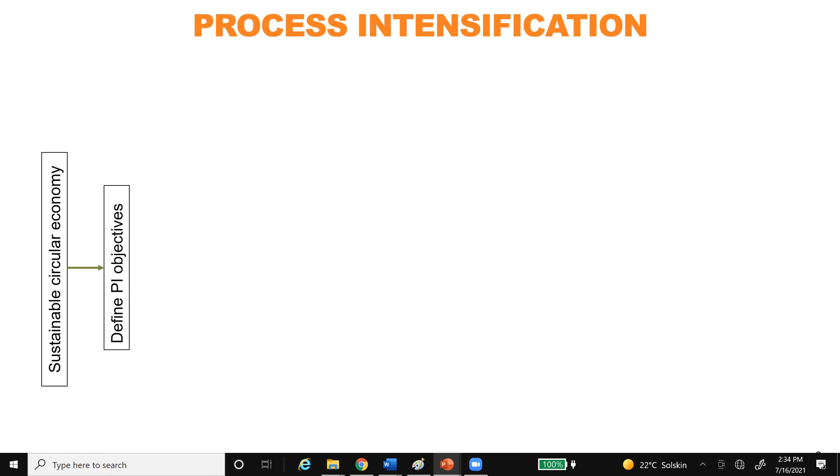Based on this, we define the process intensification objectives. There are many ways to achieve process intensification. Almost everybody can claim that they are doing intensification, so there are many ways to do it, and we have to be clear what those ways are. What I've listed in the third column are some of the ways to achieve process intensification. It is by no means a complete list. We can achieve intensification through higher productivity, better species utilization, supply chain, multitasking, equipment operation, increased efficiency, safe and reliable operation, economic improvement. These are some of the means to achieve the objectives.

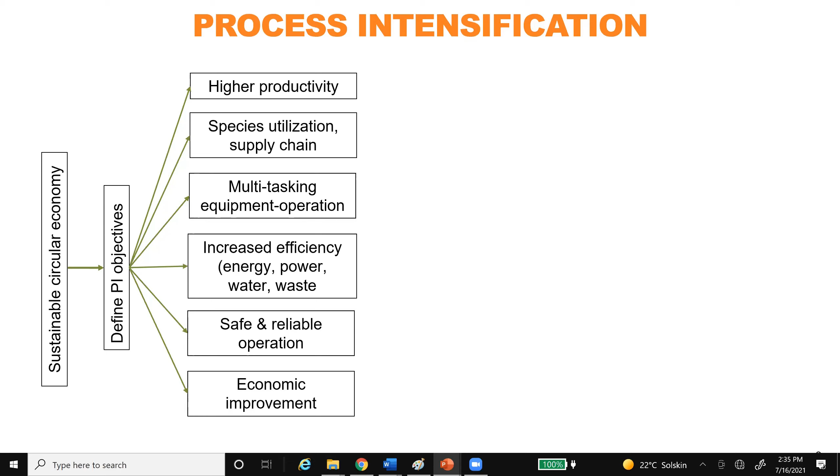How do we achieve these objectives? These are the sub-objectives of process intensification - if we want to achieve sustainable circular economy, we can achieve PI objectives of higher productivity or multitasking and so on. But to achieve these, there are different means. We can look at a better reaction path, better species allocation, heat and power management, rate size mechanisms - that means the transfer rate is connected to the size of the mechanism - tasks and equipment, scale up, scale down, controllability, operability, and many more. All of those things can help us achieve some of the objectives that I've listed.

The means to achieve these objectives I've given - what is the result of that? By one or more of those means, if we achieve the objectives, we will see that we have defined a novel network of processes that can be called a module, a flow sheet, or an enterprise at a larger scale. We can have novel integration schemes. We will see that we can generate new intensified equipment. We can have new processing routes because of reaction, species separation, and so on. All of these results can be achieved through the means to achieve PI, and the means to achieve PI will give us the objectives criteria that we would satisfy, which would then lead to sustainable circular economy.

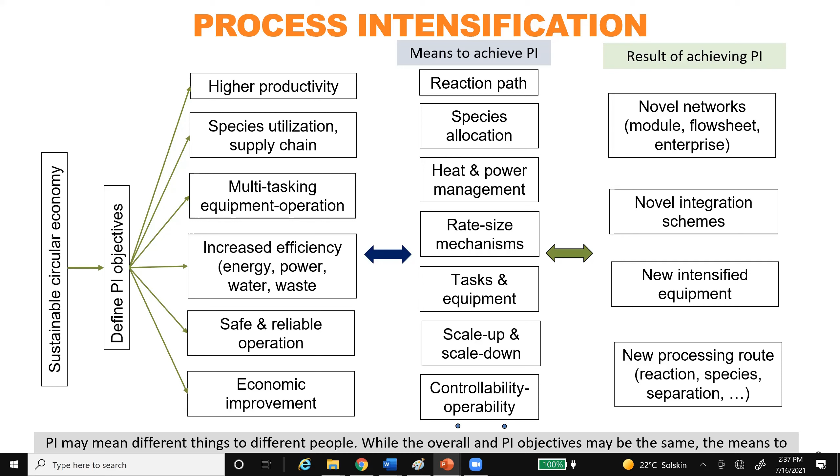Let us see some examples of intensification. On the left, you see the actual process that we have also used during the first and second webinars, for production of methyl acetate from reaction of methanol and acetic acid. The entire process can now be represented by reactive distillation, which will give exactly the same product.

That's process intensification. In a similar way, this is also a process that has actually been designed and converted, in the case of edible oil. The final step of edible oil processing is to remove some chemicals that have a bad smell, so you don't get bad smell in your food product when you cook. But these chemicals that have to be removed are actually quite expensive products that are needed by the pharmaceutical industry and the food and other industries. So it is valuable to separate them and use them in other industries.

The process you see on the left can be converted into one equipment where there are multiple subsections doing all the operations that you see on the left. So the question then is, can we have a computer-aided system that can take this process on the left and give us the result on the right? We will see how to get that.

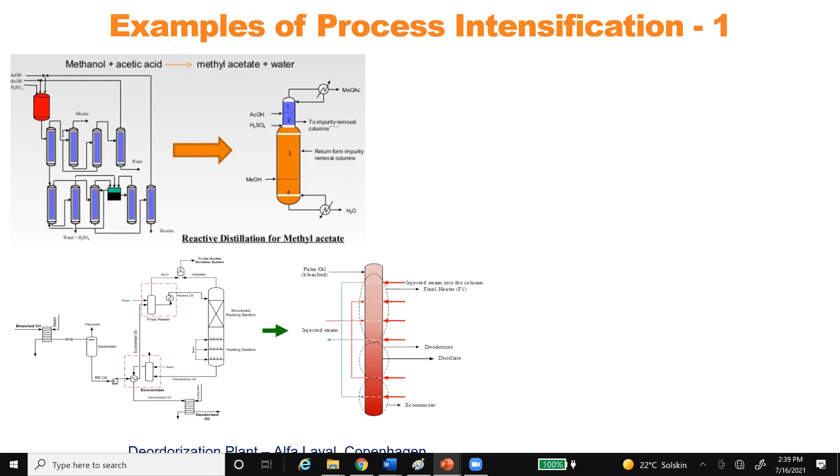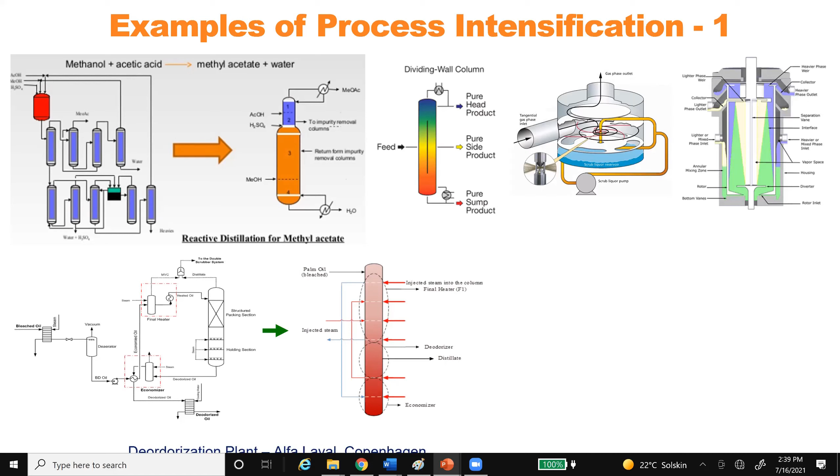Other examples of intensified equipment include a dividing wall column, distillation, mixing operation, reacting mixing operation, a separation operation, and another example of not converting everything into one equipment, but just reducing the size, reducing the number of unit operations. These are all engineering domains that we know commonly very well, but there are other domains that also involve intensified operation.

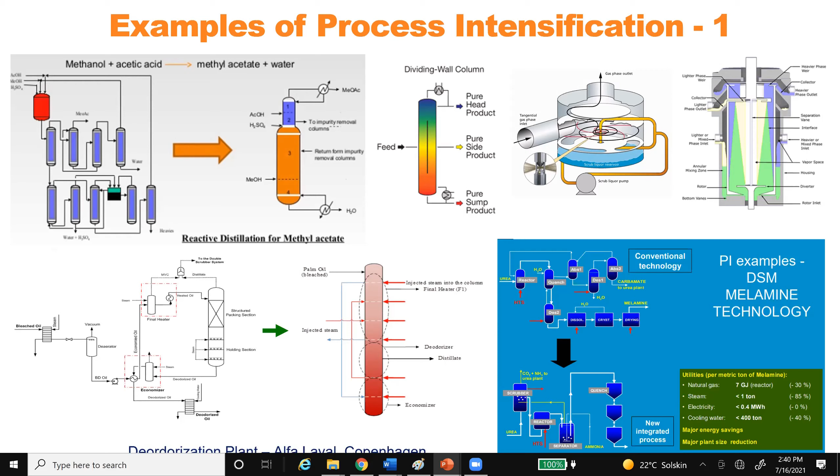For example, the space module that goes on space missions. If you take all the heat exchangers and all the other equipment that are there and lay them out flat on some land, you will see that it will cover more than a football stadium.

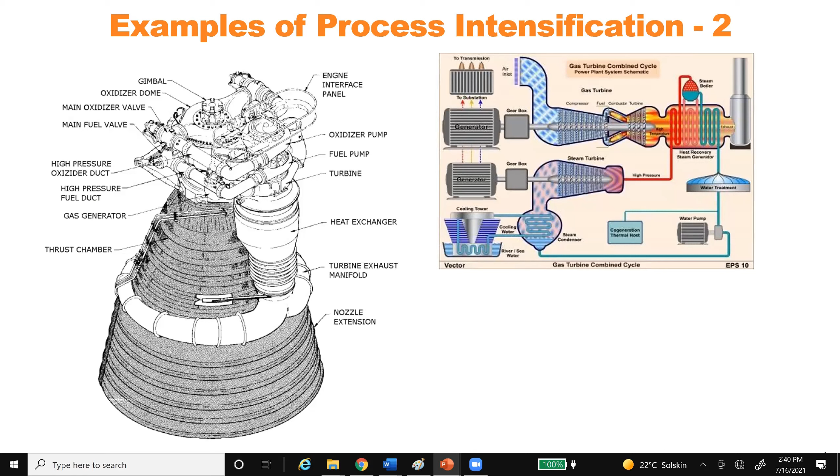So there's a lot of integration and intensification going on in space modules. Also for power plants, gas turbine combined cycle, there's a lot of intensification. Even in food production, if you are familiar with Krispy Kreme donuts, these people have actually, through intensification, reduced the number of production steps from more than 10 to only 6. That's a good example of intensification. So there are lots of examples of intensification.

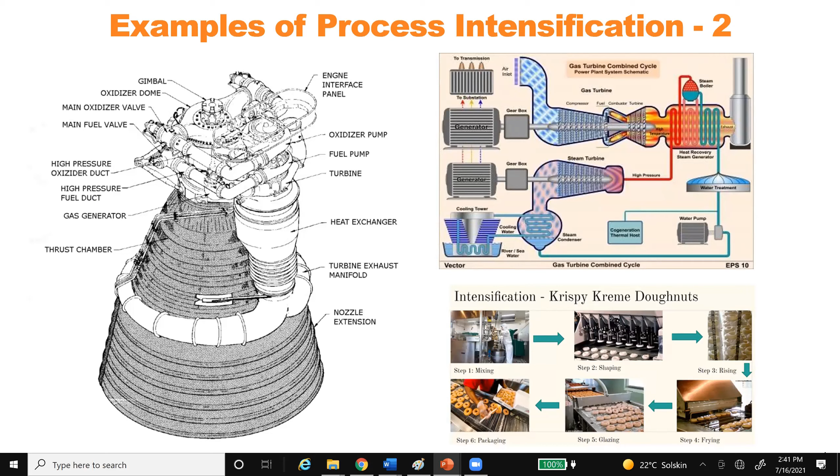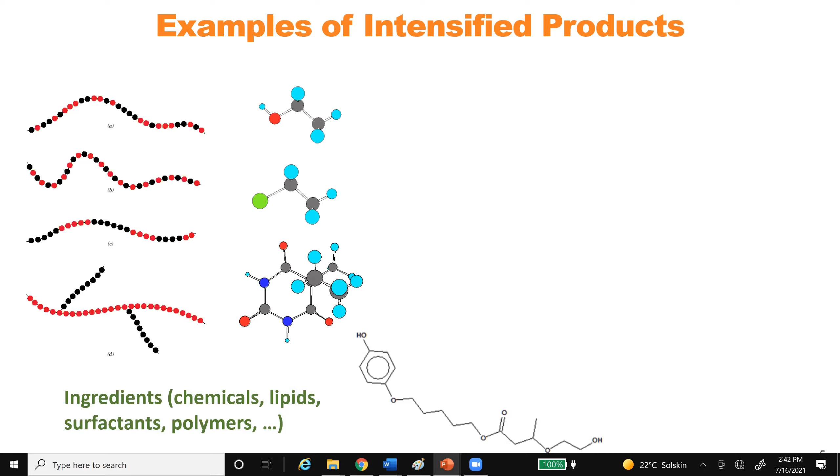Even in products, you can see these chemicals - the red and black are polymers, and the other ones are larger molecules. The really long molecule is a lipid, surfactant. They have multiple purposes. For example, the surfactant has one end that is hydrophobic, and another end that is hydrophilic. So if we can define molecules having different functions at different ends, that's also doing the same thing as an intensified operation. Similarly, these kinds of emulsions, water-based or oil-based, and also formulated products, they all have multiple functions. So even the product can be called an intensified product.

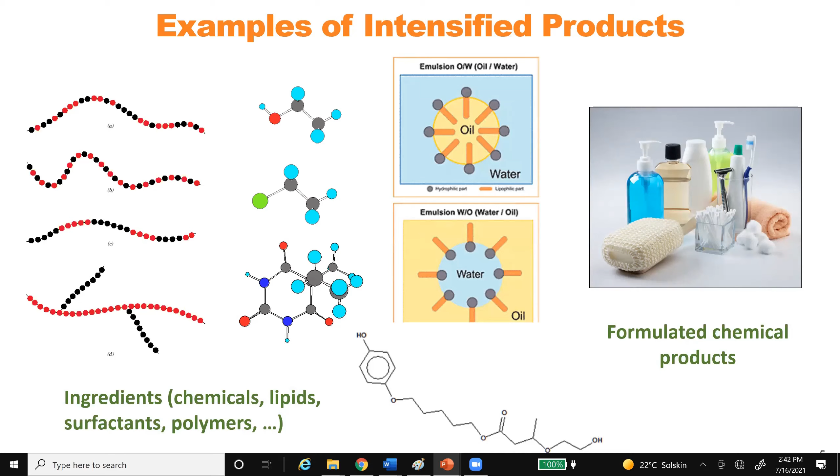So now we define computer-aided process intensification. It refers to the use of systematic model-based techniques to realize potential process intensification, that is, to determine and analyze process intensification solutions. So CAPI techniques for process synthesis, design, and analysis help to tackle challenges and accept opportunities by working at a single or multiple scale. And the scales can be unit operation, task, and/or phenomena.

So unit operation is large, task is smaller, phenomena is smaller. And if we want to go in the other direction, unit operation will give module, module will give network. So we can go in both directions, satisfying also a set of process and operational specifications, as well as match a set of improvement targets. That's what computer-aided process intensification technique should be able to do.

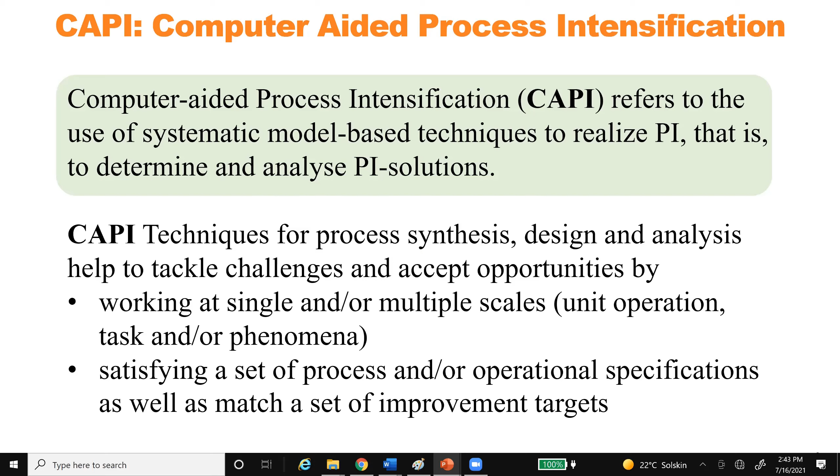So let's look at the issues, challenges and concepts. The first question is when to apply process intensification. Two examples are given. We have a process design to make a product from raw materials A and B. We would like to determine process intensification alternatives that are better than the reference with respect to a set of desired targets. Another one could be: information of product C and raw materials A and B are given.

Determine the optimal intensified process with respect to a set of desired targets. So the first one requires that we have a reference, and compared to the reference, we will find better alternatives. The second one does not require a reference - from the beginning, our objective is to find the optimal, which can be more difficult.

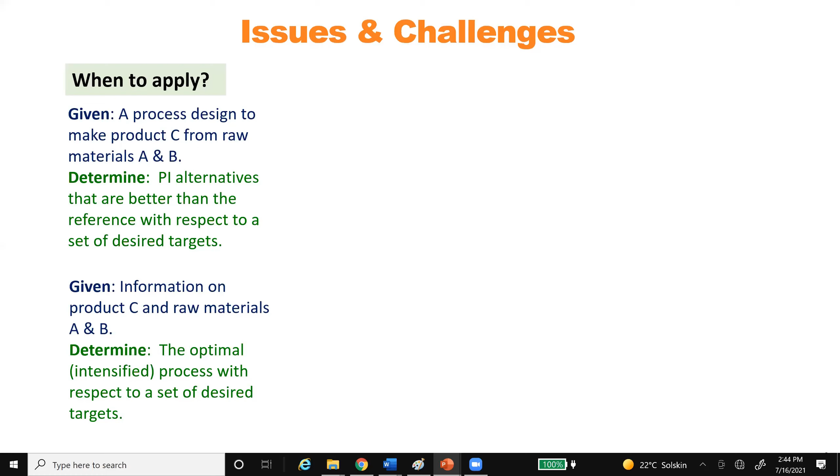So the main issues: how to represent the PI alternative. Which scale should we use to represent? Because if we are not working with unit operations, we do not have a flow sheet like the unit operations. So we need to find the scale and the representation system.

How to generate innovative process intensified alternatives. So just like we saw in the case of process groups, what way should we combine different unit operations to perform in a multi-operation way? So we need some combination rules.

How to evaluate alternatives? We need models, and if the scale we used are not unit operations, do we have the models to do the simulation? How to identify the best optimal solution? We need to find an appropriate solution strategy and also performance criteria by which we will compare.

What information data needs to be supplied? It needs a lot of data. How can we get that data? And the solution approach - this is just one way. Professor Pistikopoulos will give you another way.

Solve the following steps sequentially or simultaneously: generate alternatives, check for feasibility - that all those alternatives you generate are feasible - evaluate the desired targets, that means after feasibility check, calculate the performance criteria which defines the targets, and identify the best or optimal. What we can do is, if we use things like maximum driving force and things like that, without doing the optimization, we can be very close to the optimal solution.

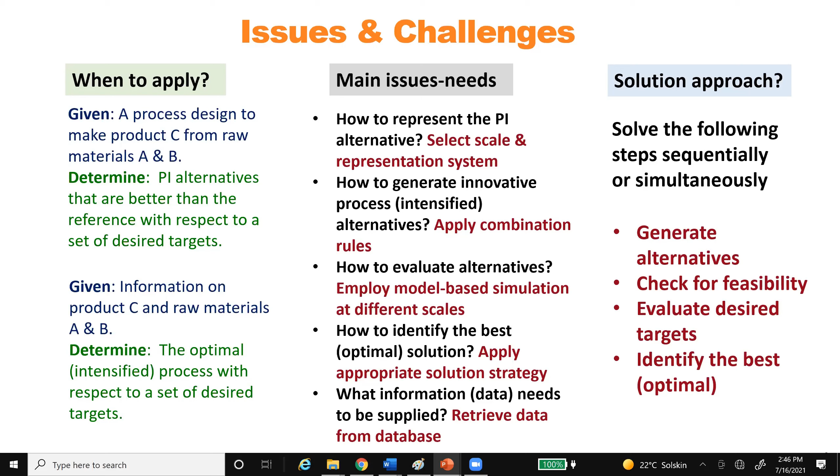So representation of the PI scheme in different ways - this is the phenomena based approach, and then the phenomena combined together gives the unit operation. This idea was developed a long time ago by Professor Pistikopoulos and his co-workers, and it forms the basis for all other methods, because we have to go to the phenomena and identify how the phenomena will be used to perform the task that we need, and how the task can be combined to become the unit operation. But he will talk more about it, so I will not go into details of it.

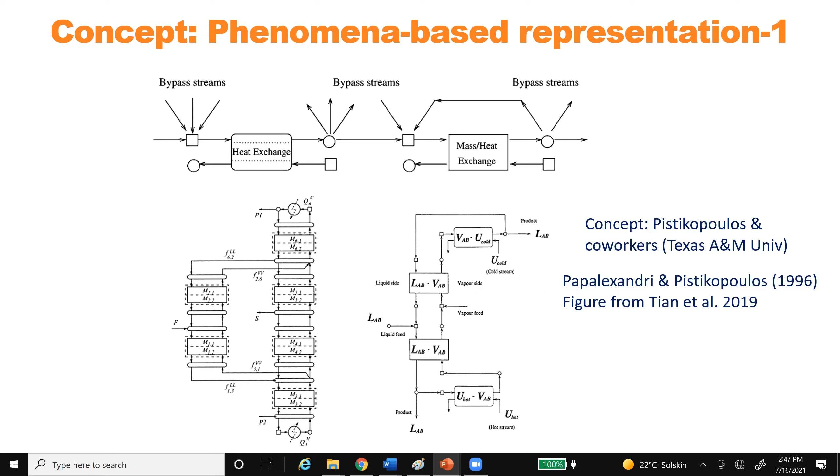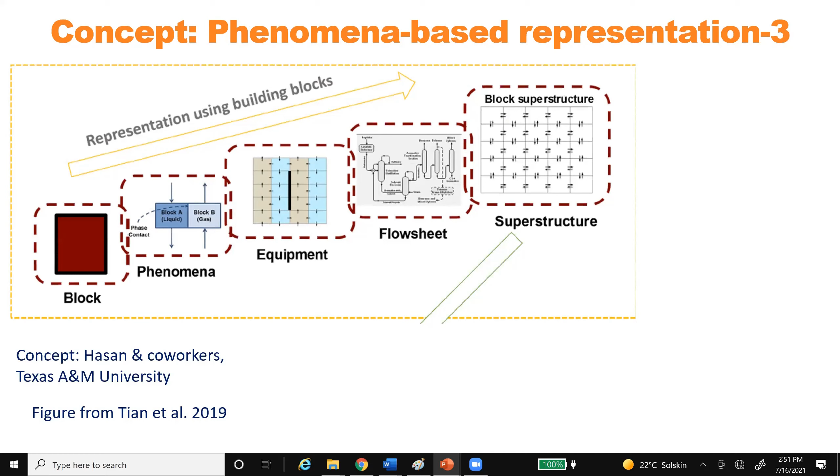There is also another person at Texas A&M, Faruque Hasan, who is working on intensification using the phenomena-based approach. He defines a building block and represents everything with building blocks, then performs an optimization to get to the final solution. We will not discuss this in detail now because it will take a lot of time.

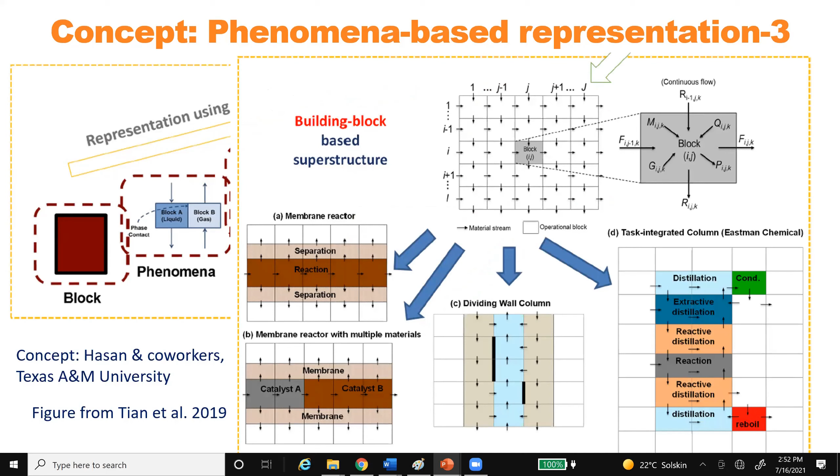So let us see why the phenomena building blocks can give us a better solution that we cannot otherwise get. This comes back to molecules and mixtures. Let's say we have 4 molecules and we want to find out if there is a binary mixture among them that is the best. With 4 molecules, the number of binary mixtures we can make is 6. So we can easily calculate these 6 binary mixtures and see which one satisfies our requirement - there are not many alternatives.

But if instead of 4 molecules we have molecular groups like CH3, CH2OH, and ask how many compounds we can make with a minimum of 2 and maximum of 4 of these groups, we will see we have more than 6 molecules. And if we have more than 6 molecules, we will have more than 50 - at least more than 10 binary mixtures.

So we can see that by going lower in scale, we can have more alternatives. And if we go even lower in scale to carbon, hydrogen, oxygen - how many ways can we make groups with carbon, hydrogen, oxygen, then how many molecules can we make, and then how many binary mixtures can we make - it will be millions.

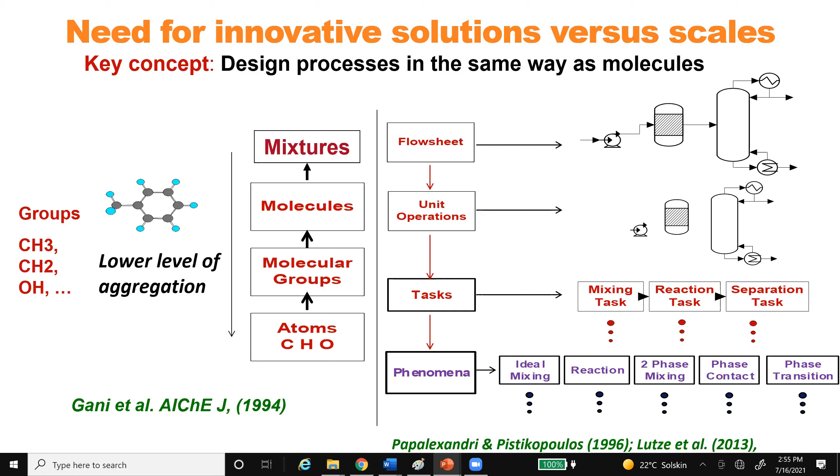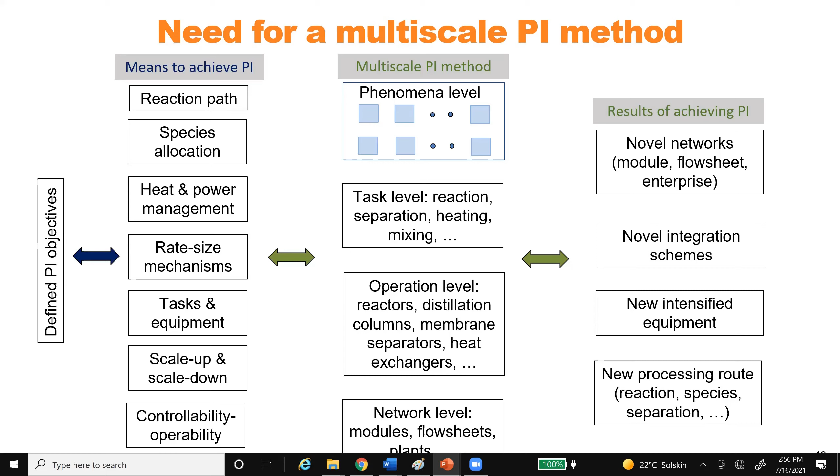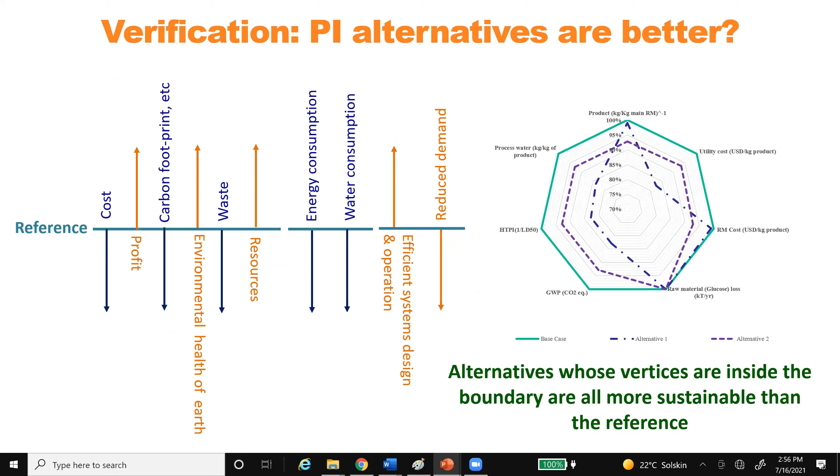We've talked about this before, so I won't explain too much, except that whatever alternatives we generate have to be inside the reference. So, the solution approaches and tools — I've discussed this also before. We represent this mathematically, and in the mathematical representation we have the objective function, the process constraints, and so on.

Depending on the model, it will be solved as linear programming, nonlinear programming, mixed integer, process simulation, and so on. The solution strategies include direct solution strategies and decomposition-based ones. Others use direct solution approaches; we use the decomposition-based approaches. Both have advantages and disadvantages. I prefer the decomposition-based approach because it gives us more flexibility and lets us solve bigger, more complex problems.

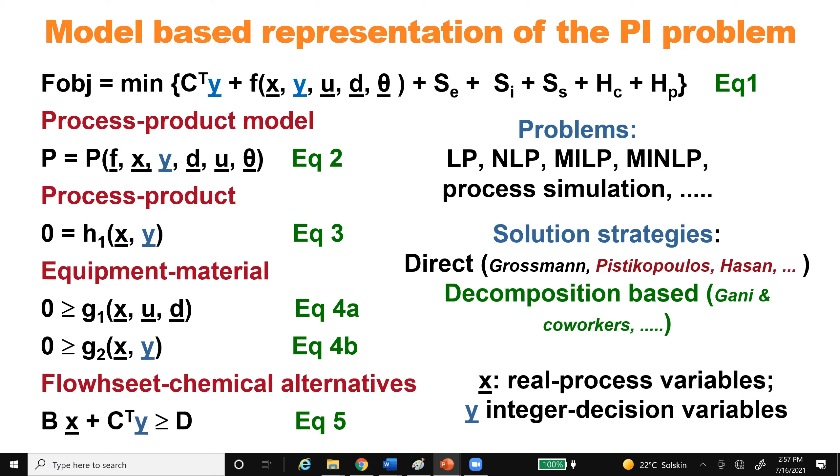Analysis of the system shows that there are 3 azeotropes, and 2 of them involve water. So if we can remove the water as soon as possible after the reactor, we have fewer problems in terms of separation. That's why the first thing we do is get rid of the water.

Then we see if we can actually combine the water separation with the reactor, so we don't need the water separation and the reactor operating separately. So we combine the water separation and put that into the reactor, and thereby reduce that separation step. And then we find out that—

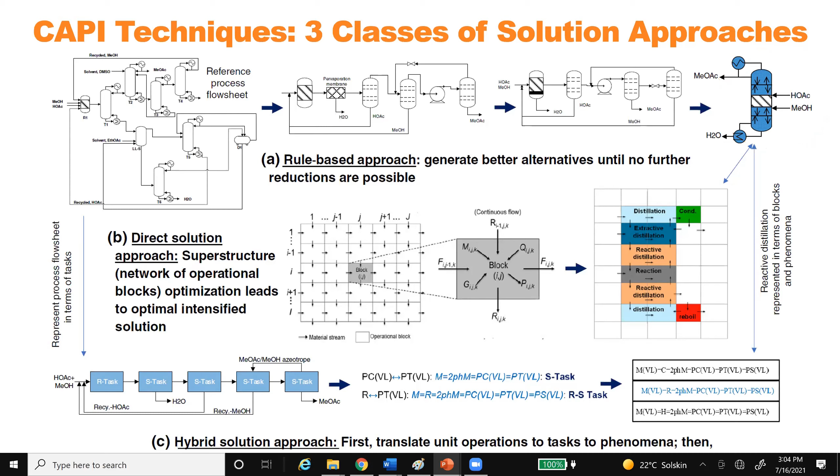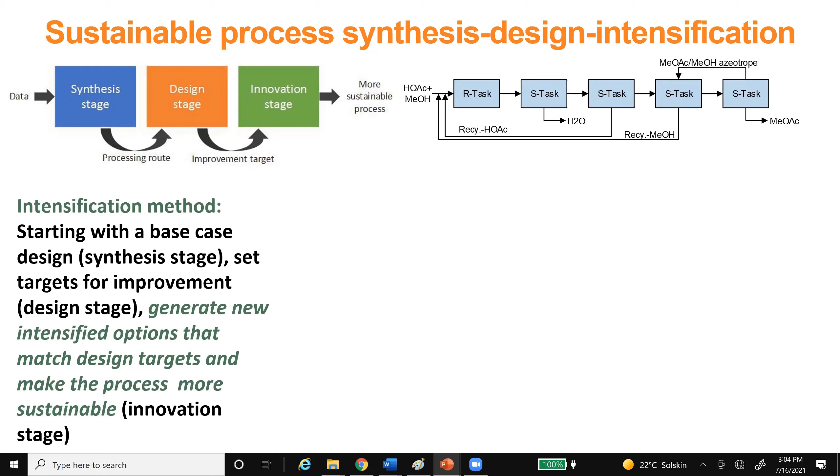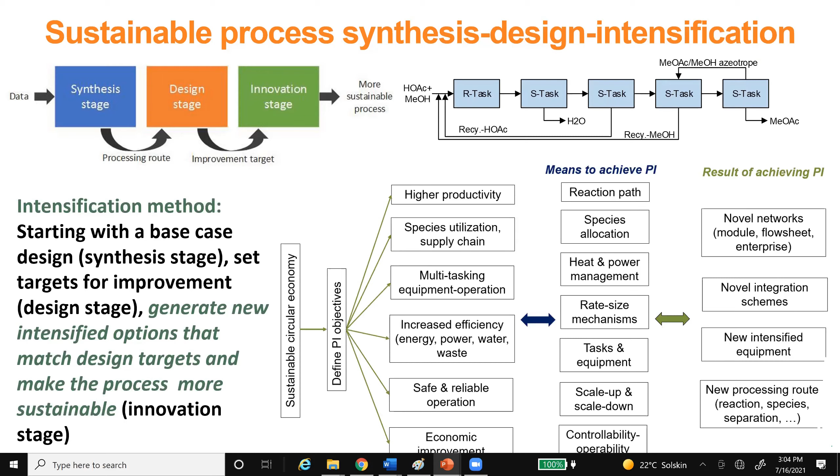So coming back to our original, we need the innovation and we are applying the intensification. So we want to generate new intensified options that match the design targets and make the process more sustainable. We start with the reference process, we convert that into tasks, and then we look at the means to achieve the process intensification and which of the results we are interested in. And by combining the different phenomena and tasks, we can get to any of the solutions on the right. And I will, okay. So how do we do this?

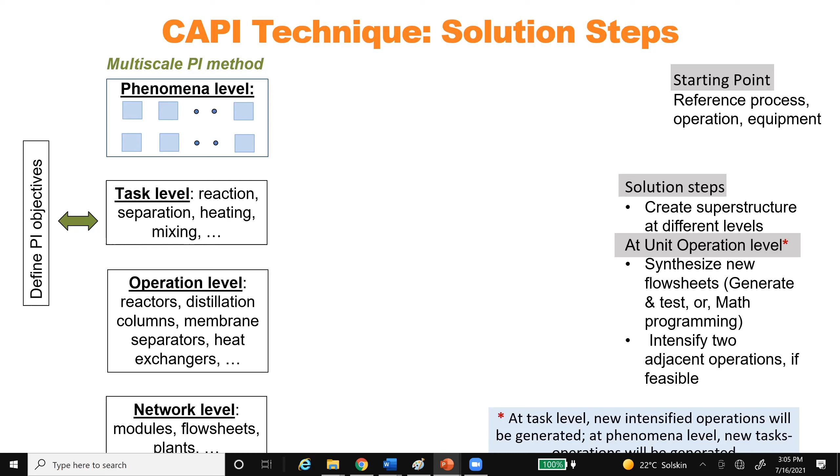As we are talking about that, we do it in a decomposed way. So we need the reference process, operation, and equipment. If we have the reference process, we know which tasks are needed, which phenomena are needed, and then we create a superstructure. And then from the superstructure, we enumerate all possible combinations. And this is the superstructure.

So in order to generate this superstructure, we go back to the phenomena and we go back to the tasks. But we generate this superstructure in terms of unit operation. And then it's just a question of making sure that we have all the possible alternatives, feasible alternatives. And then we can do the calculation and find out which is the best. There are other ways to do it.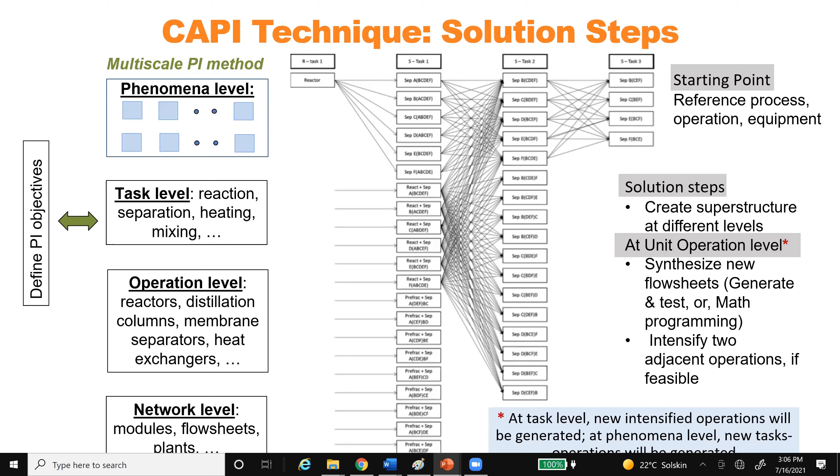There is a review paper coming out from Texas A&M, from Professor Pistikopoulos' former student, who's now a faculty member in a university in the USA. This paper gives a list of many of those tools.

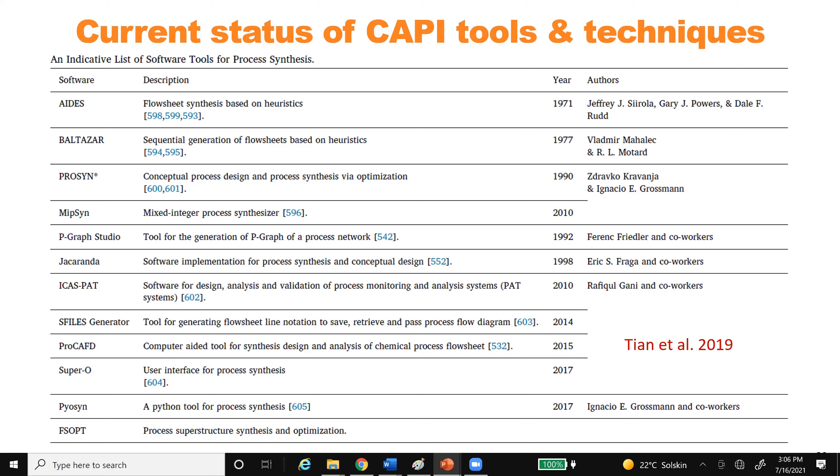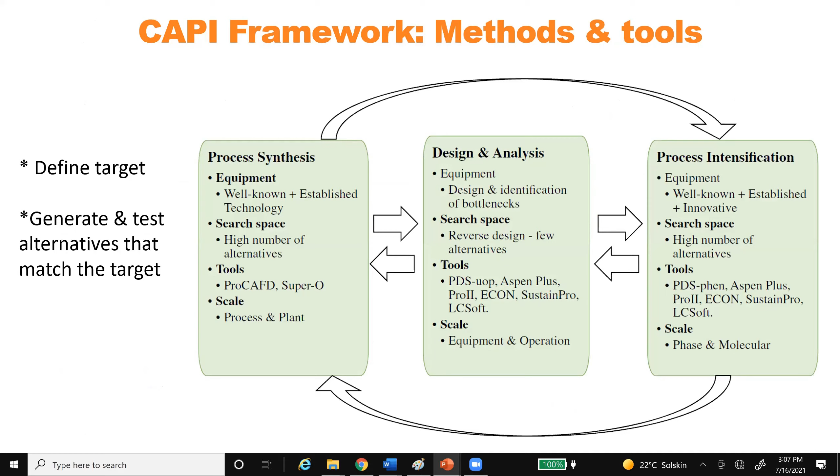Going back to our method, as we said, we define the target and then identify alternatives for the target. But in order to do that, we need a lot of information generated from the process synthesis stage and the design analysis stage. So I think it will be good to give you some illustrative examples.

Here is a process that we have taken from the hydrocarbon processing annual yearbook or encyclopedia. One good source for which process to take, to see whether an intensified alternative can be found, is to go to the hydrocarbon processing annual yearbook, which gives many processes. Select some, especially one with a reactor followed by separations like this one — it's a good candidate.

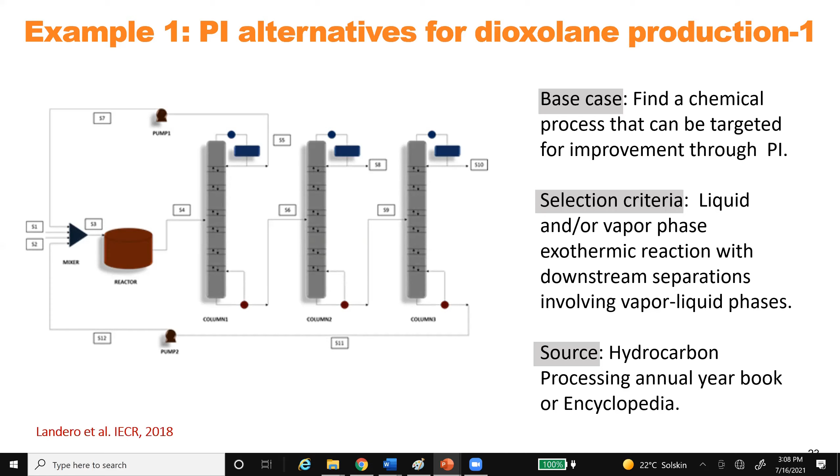So we have a base case process, and we could find the patent for this process design. So we have all the information. We convert, in A, the process flow sheet into tasks, and then in B, for each task, what are the phenomena involved. Then we combine all those phenomena into a list of phenomena.

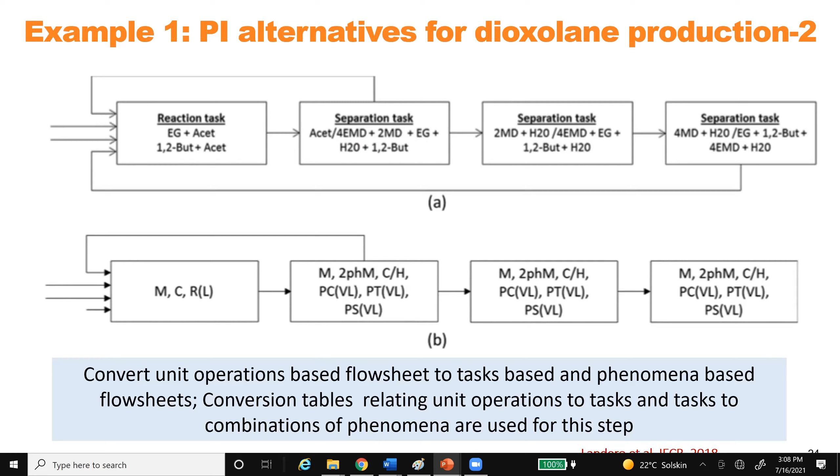From this list of phenomena, we find out which simultaneous phenomena blocks can be formed. And then based on that, we create the superstructure.

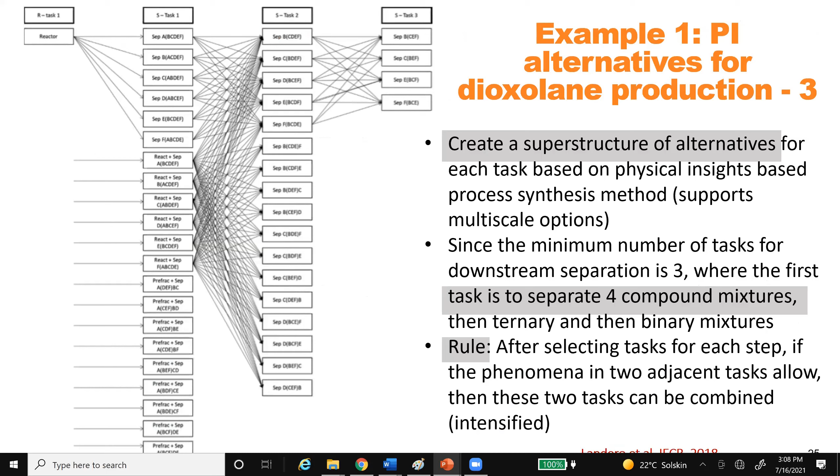After the superstructure, we try to find out what is the best separation for 4 compounds, then 3 compounds, then 2 compounds. And then we have the solution, which I will show you afterwards.

When I use this for teaching purposes, I ask the students to generate an alternative which is not among the 4 that I'm showing.

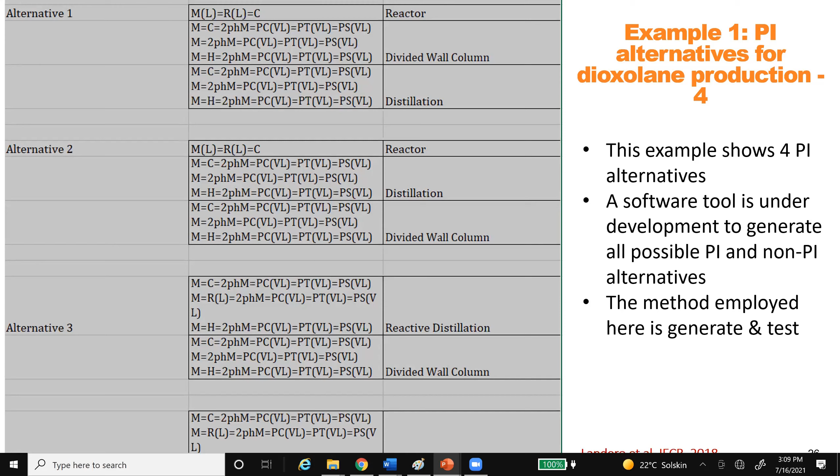And then we have the reference, and we see that our alternatives are much better than the system that can be found in the patent. So this is one example.

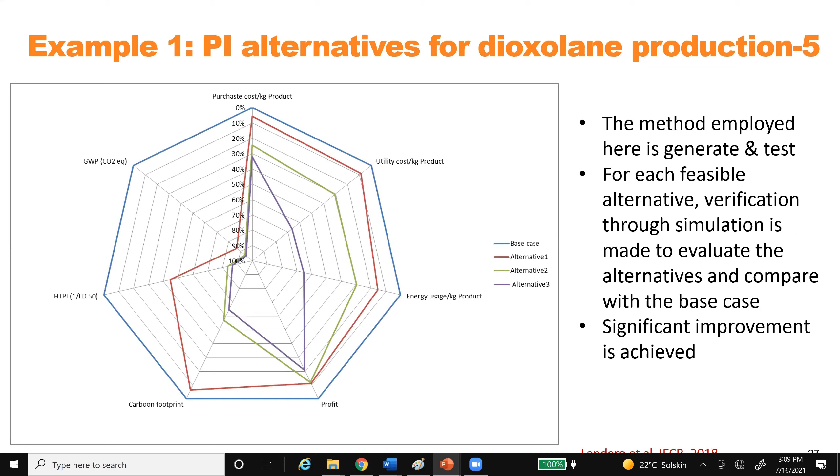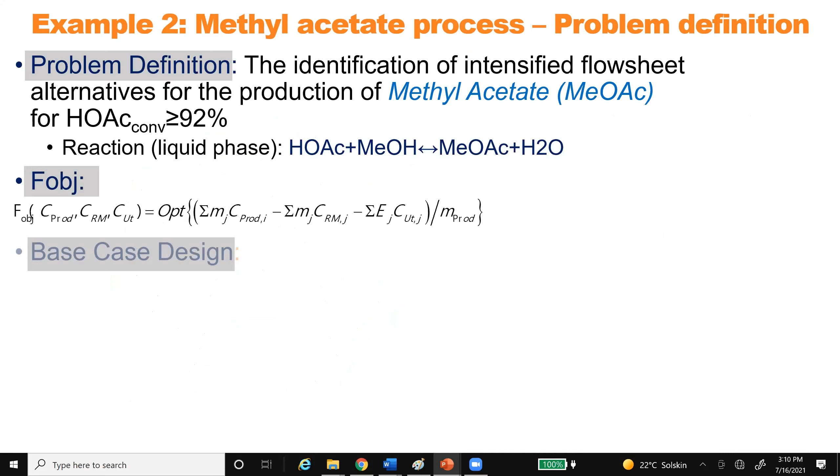Another example: we will take the methyl acetate example, because it shows another way of doing things. We have the information about the reaction, all the information about the compounds, and we have defined the objective function, which we want to minimize. The base case design is the flow sheet.

We analyze the flow sheet in terms of sustainability, and also indicators like the closed path and open path. You can see an example of the closed path and an example of the open path. Open path is things come in and go out. So what we see is that methyl acetate is going out, and the closed path has some problems, which we will see now.

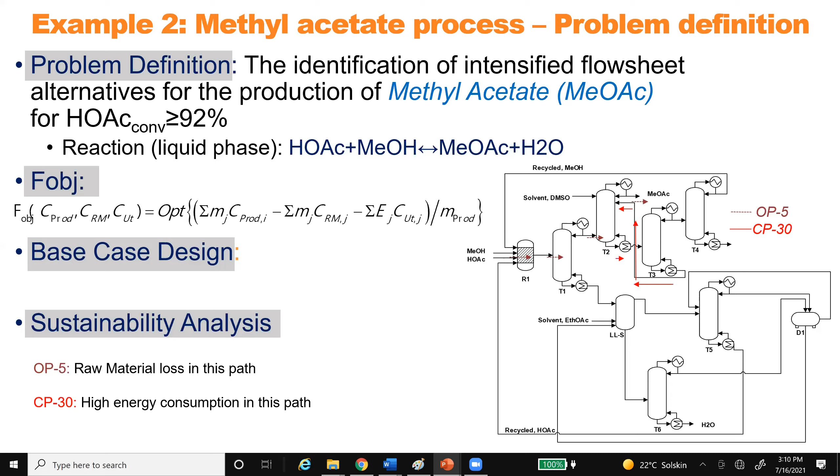The problems will be looked at in terms of utility cost, energy demand. In the closed path, also the energy demand, carbon footprint, and so on.

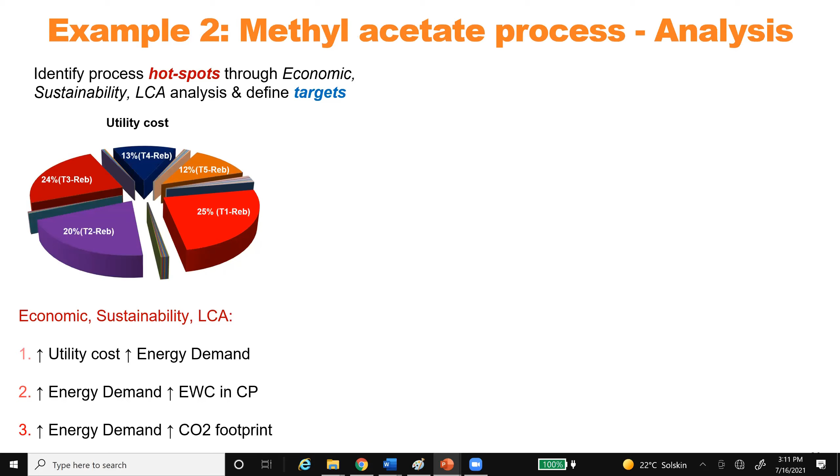With the utility cost, we can get the pie chart, and from the pie chart we can easily see which unit operation has the problem. We also do the utility cost in terms of skyscraper plots and footprints. Again, we see that the bigger pie cuts also represent the largest skyscrapers.

Based on that, we can say that we need to reduce the energy demand, reduce the number of operations, increase the conversion of acetic acid, explore the possibility of using hybrid unit operations, and improve sustainability and LCA factors. So these are all there.

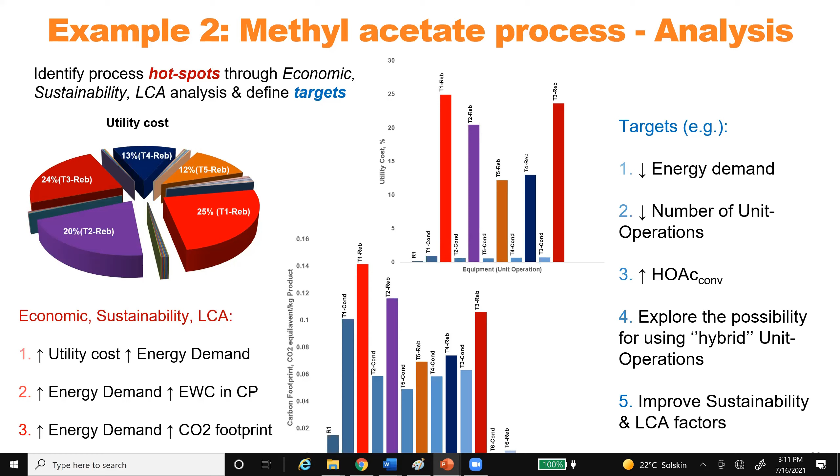We know that we have to do something about the reactor, something about the distillation columns because the reboiler duties are high, and so on. So now we go to the process analysis.

We look at the thermodynamic insights. Remember the binary ratio matrix — we have 4 compounds, so we have 6 binary pairs.

We check all the binary pairs and what the problems are with those pairs. We look at their azeotropes and see that one azeotrope is pressure sensitive, the other two are not, and water is present in two of the azeotropes.

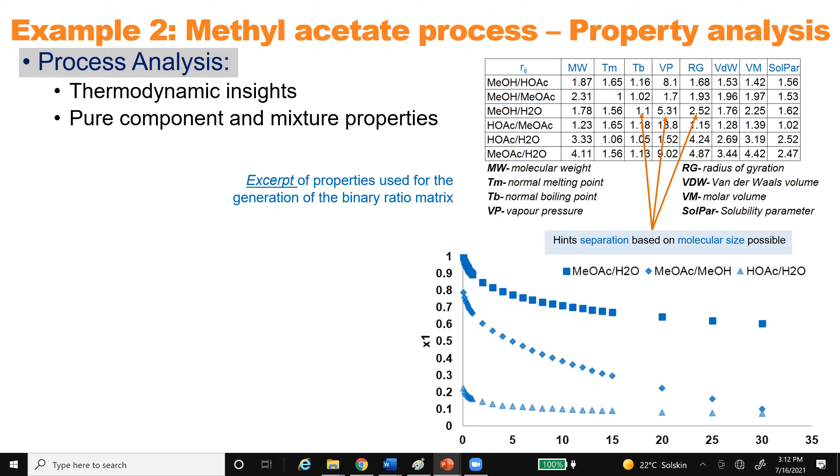Then we find out whether we want to do reaction or separation, and what phenomena are involved for each of those azeotrope separations, as well as all other separations.

So we have a list of all the phenomena building blocks — these are the original phenomena. Remember that the PBB, or phenomena building blocks, are combined to form the simultaneous phenomena blocks, which are combined to get us a basic structure. And then we start with the original process.

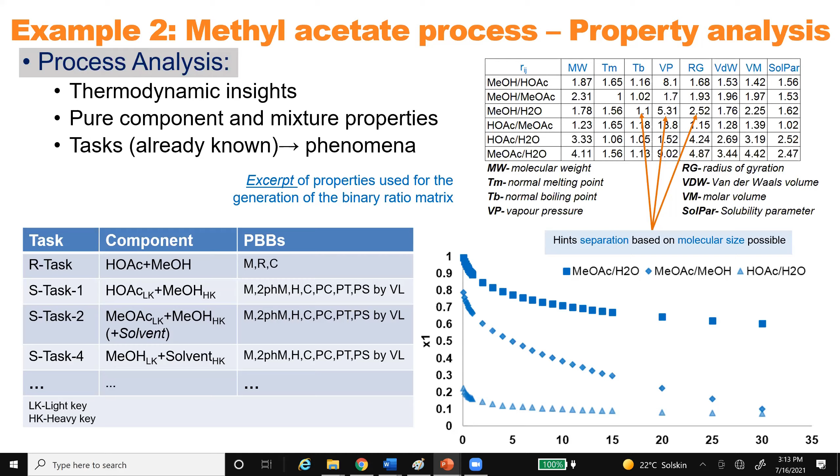We know after the reactor, we need to separate. And then what are the different possibilities, after that, for 3 compound and then 2 compound separations?

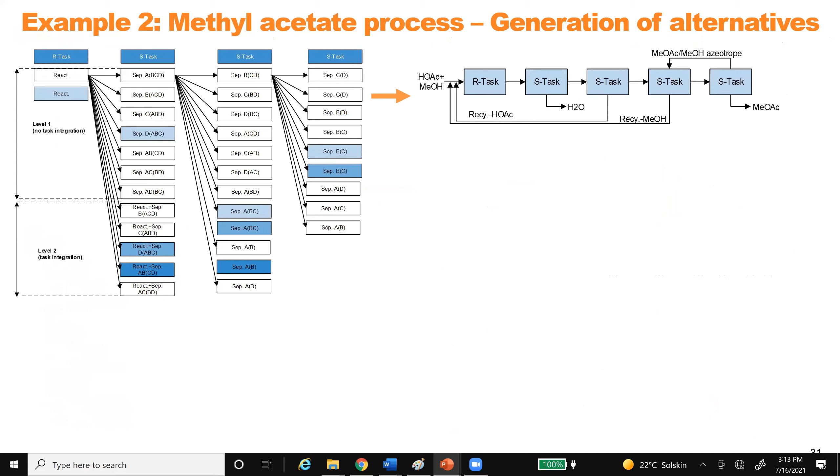So knowing this information, as we said, we needed to separate water out first. So the first separation we do out of the 4 compounds is remove the water. Once we remove the water, the 3 compound separation becomes easier because we have an azeotrope between methanol and methyl acetate, and acetic acid comes out very easily. So that's the easy separation.

And then for the 2 compound separation, we have pressure swing distillation. That's one alternative flow sheet already. Another alternative is to combine membrane separation for water and put it into the distillation column for the reactor, and then we have another alternative. Like this, we can generate many alternatives - in fact, more than 10 we have generated. Which one is better? We will see afterwards.

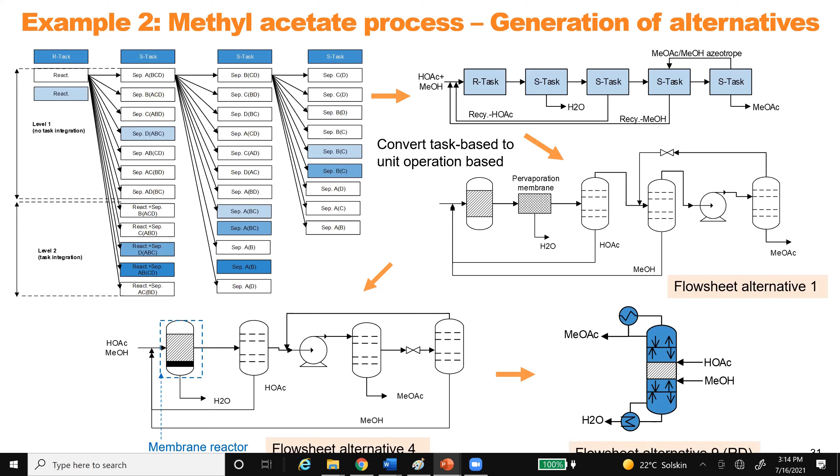Now let us look at another way to do the same thing.

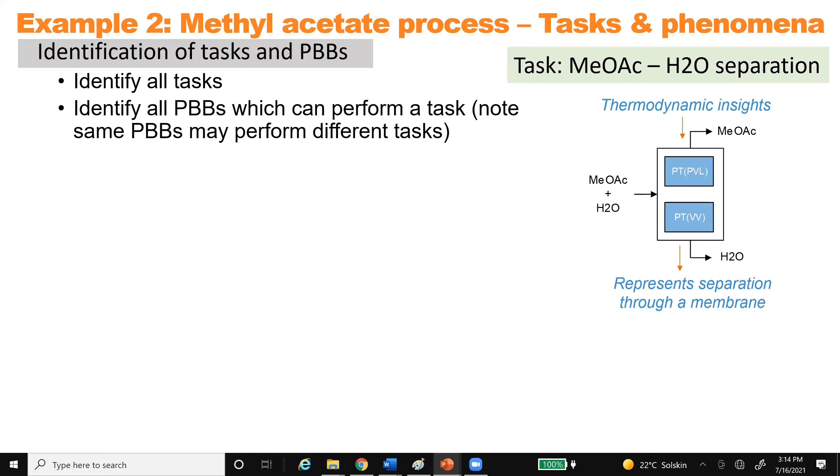We have to identify all the tasks from the reference. We identify all the phenomena building blocks, and then we see how many phenomena building blocks we have. We have 15, giving 16,000 combinations, and from there we take the ones we need.

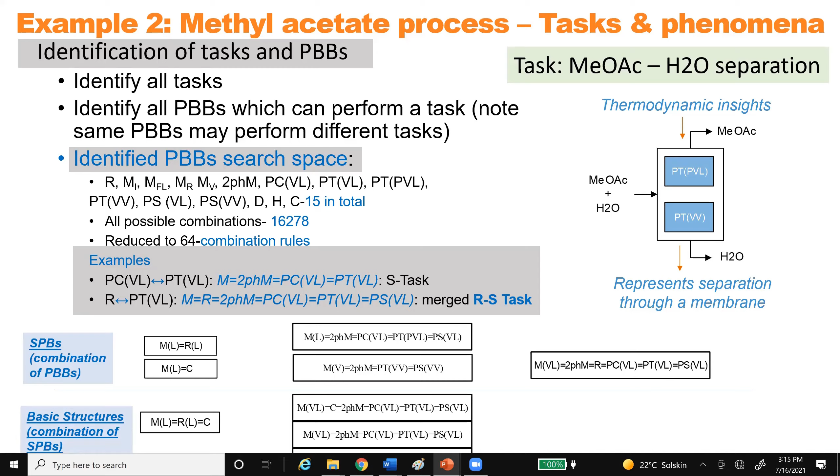So for example, here is a separation task, here is a reaction separation task. Then we have the SPBs combination, which is a combination of PBBs. We have the reactor, then some separation, and some 2-phase separation with reaction. From those SPBs, we can make a basic structure like a single-phase reactor or a multi-phase reactor, and then we take those multi-phase reactors and all those SPBs to generate whatever we want.

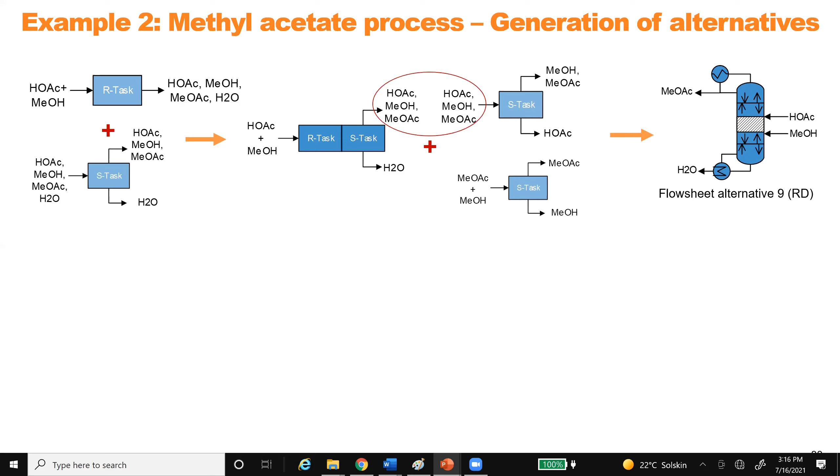So again, we come back to our reaction task and a separation task of 4 compound separation. We take the reaction task and put the separation task together to get rid of the water. Then on top we have 3 compound separation, which we combine with 2 compound separations, and we have different alternatives. Then we combine them together and we have the reactive distillation. So this is the way the phenomena have been combined.

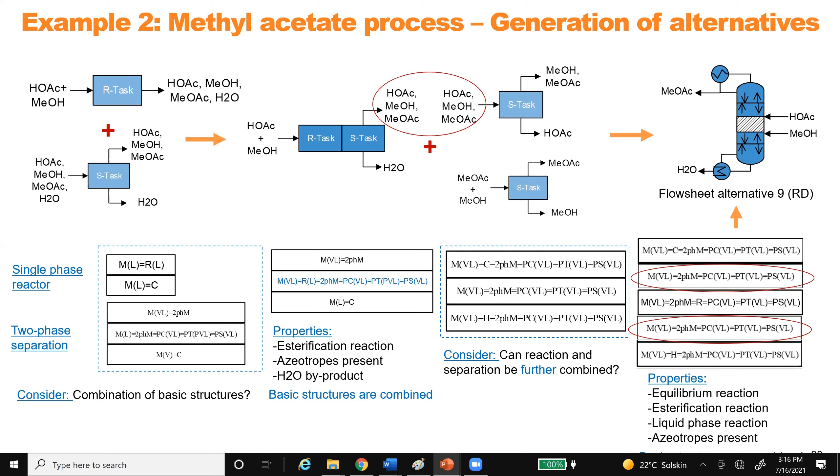And then, as I said, we increase the number of reactive and non-reactive intermediate SPBs to get to the product specification we want. Okay, so you saw the example in 3 ways.

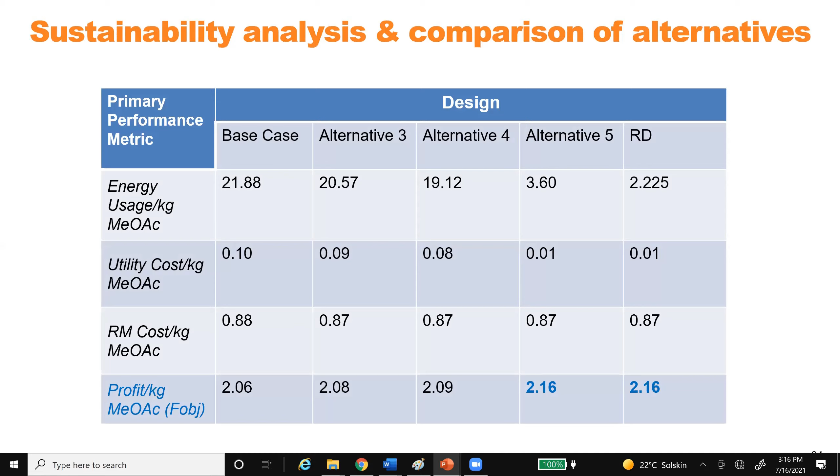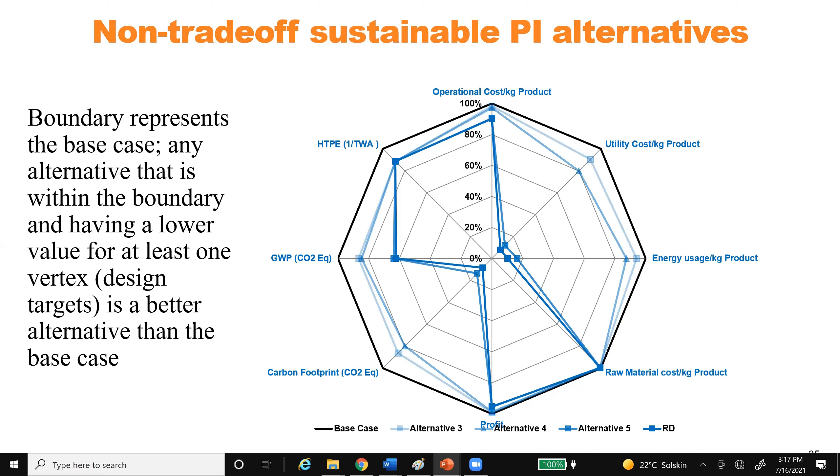So finally, opportunities, challenges and perspectives. Many opportunities exist, but targets need to be defined. For example, reaction is feasible, but downstream separation is difficult. In the biopharma and food industries, can we do them together in a single pot through intensification? That is a very good opportunity for many people who would like to apply PI.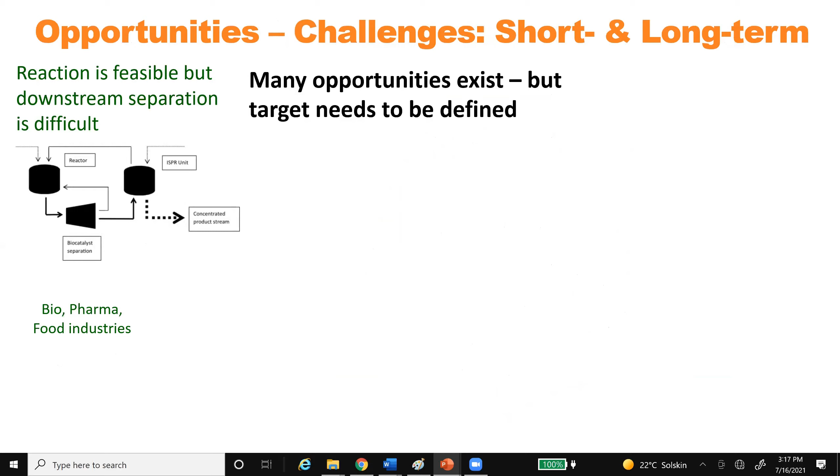Then reaction is feasible, but reaction and separation tasks are energy intensive. Can we reduce the energy required? Or the process is feasible, but is energy and/or water intensive and generates waste - that's typical of chemical and petrochemical industries. Can we do something with PI? So which of these can we say a priori a PI solution would be feasible?

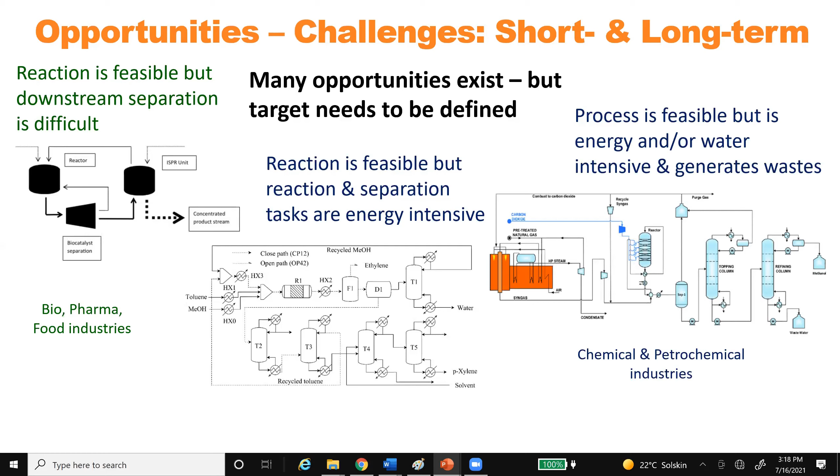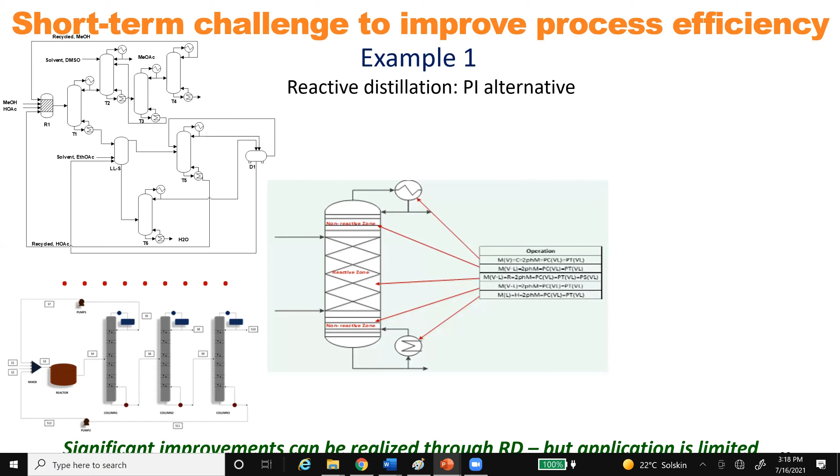We can see, I'm just showing you these 2 that we have solved - we have solved many more of these kinds of problems. All of these processes can be converted into a reactive distillation or divided wall reactive distillation if the answer to all the questions on the right is yes. If the answer is yes, all we have to do is find out the condenser duty, the reboiler duty, how many stages we need below the reactive, how many reactive stages, how many non-reactive stages above the reactive. If we answer those 5 questions, we are able to convert any chemical process into a reactive distillation, and the phenomena blocks are already there.

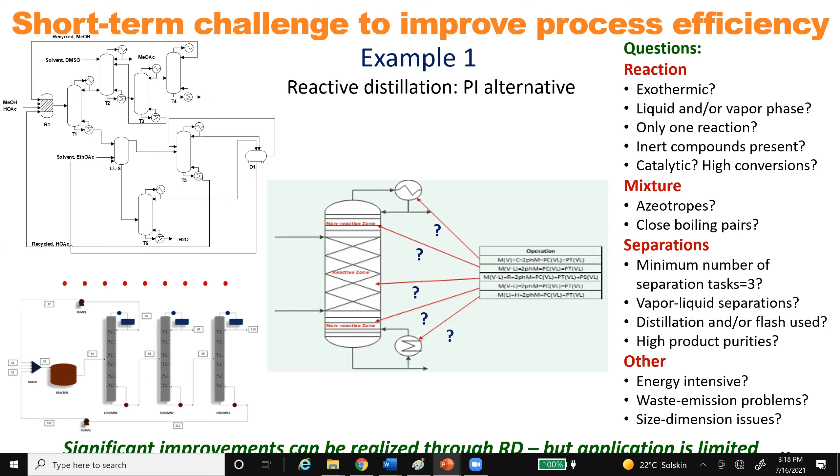So if we look at the future, what we need to see is that we want to achieve sustainable development. We can have an integrated network of more efficient modules. We can have PI equipment, smart materials, catalysts, membranes, and so on. And we can have computer-aided process intensification methods and tools. All of these combined together will help us get sustainable development.

We can solve the reverse problem formulation and solution for PI alternatives, simultaneous material design and process intensification for hybrid operations with new materials, wider application of PI solutions, the range of processes that can be improved, verification, and software.

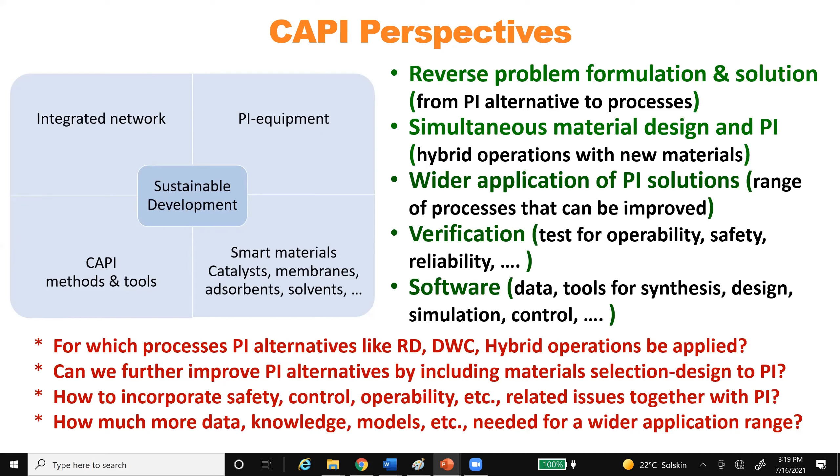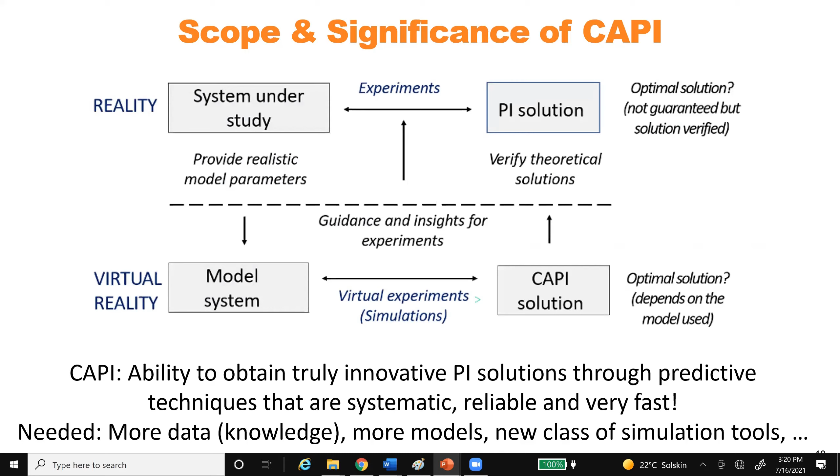I think I already mentioned this in the previous lecture, so I will not go through it. It's the same idea that we need to integrate reality with virtual reality, and then the references. So with that, I will end my second lecture.